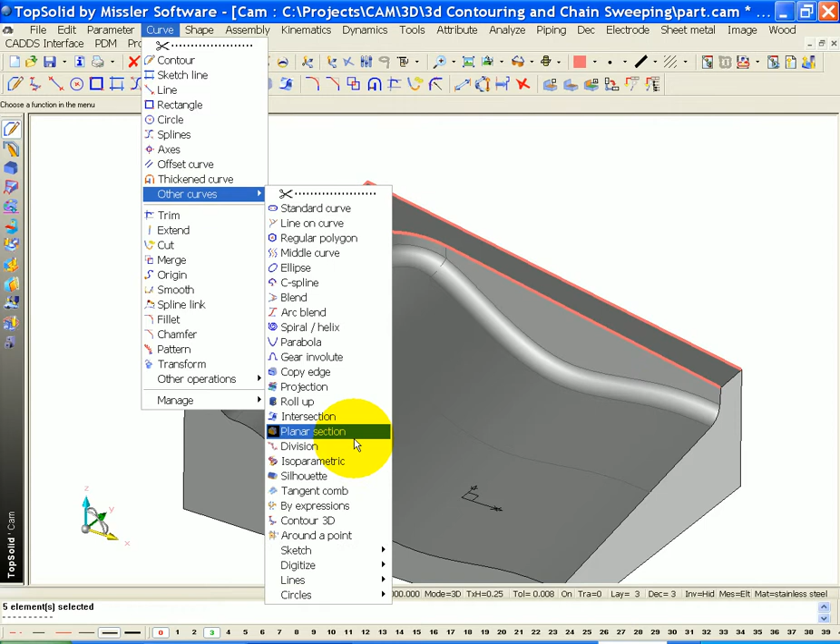So I'm going to go to Curve Projection. And I'm going to window select them. Z positive. To a plane, I'm going to set Show Curves to No, XY. And now I'll hide the driving curves.

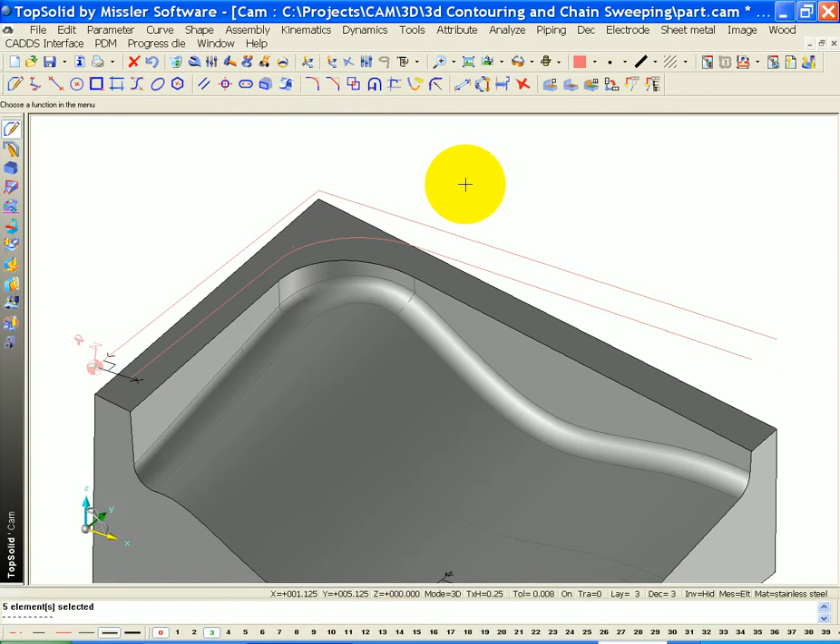From here, what I want to do is this. Right now, I'm going from a fillet to a sharp corner. And I need to have a little bit of a fillet on that sharp corner to have an even number of segments, or to be able to make a nice smooth transition between the curves for my guide surface.

So what I'm going to do actually is I'm going to offset this out. We're going to offset that out to a thinner line style. So I'm going to offset that out maybe 1/8 of an inch. Offset that out maybe 1/8 of an inch. And now what I'm going to do is cheat. I'm going to go to another layer. And I just want simple lines here.

I'm going to go from there to there, there to there, here to here, here to here. And you don't really need to do this. This is just showing you ways around stuff. I'm going to trim those together. Trim that to that curve. Trim this to this curve. Do reverse trimming as well. And I'll sew all those together.

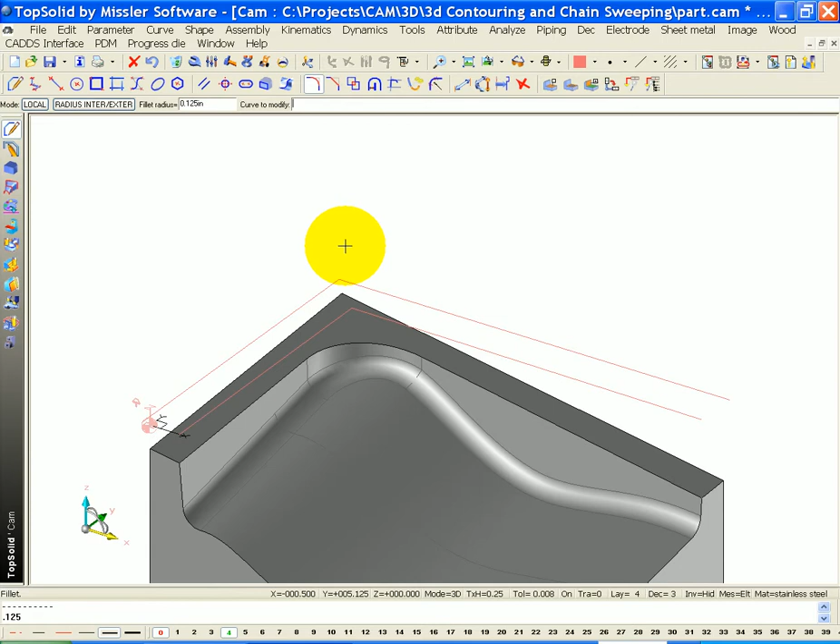And now what I'm going to do is add some fillets. I'm going to say I want a little 1/8 inch blend there. And how about a 1-inch blend here? If I look straight at this, you can see my 1 inch is following nicely along my edge.

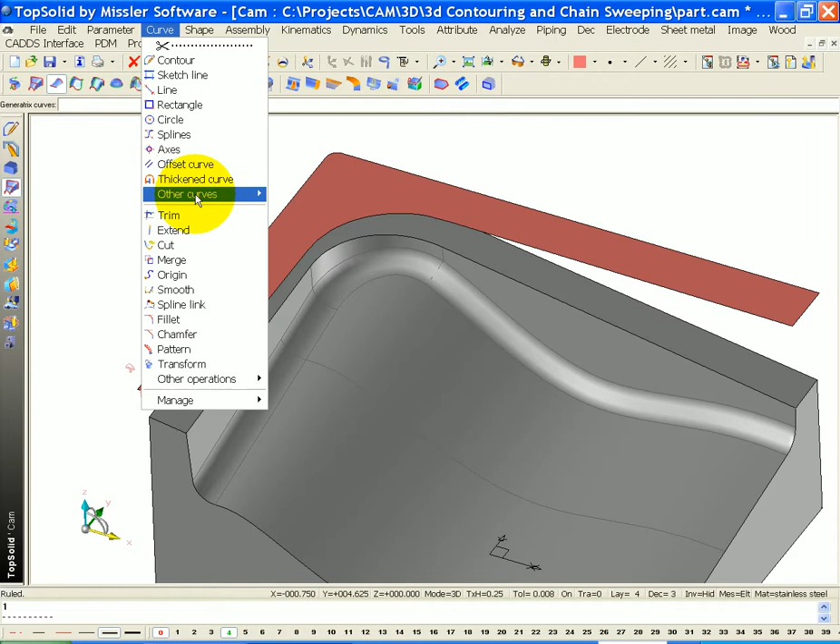And now from here, I'm going to go make a ruled surface. I'm going to rule between that and that. Okay? The act of doing that is actually going to make the U and V curves based on the two curves that we ruled between. To show you that, if I go to here and go to Isoparametric by Parameter and select it, you can see the U curve, and that's really what's going to guide the toolpath.

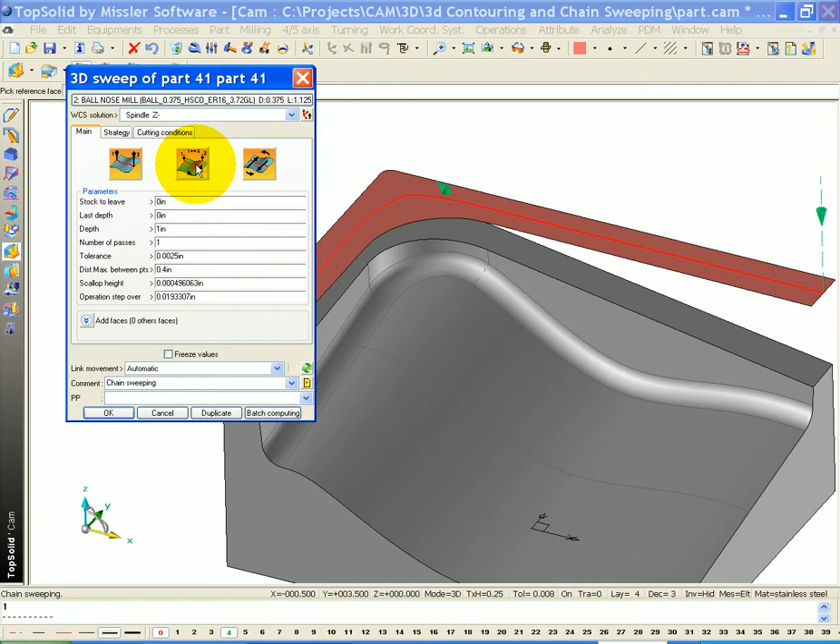Okay? From there, let's go to 3-axis, chain sweeping, and instead, let's select this face to machine. Here you can see your U curve. Let's switch it to that. We'll use the same tolerancing and whatever. The only difference here is we're going to go to Project on Part onto that face, or as many faces as you want. I'm going to say End, and say OK. And now here, you can see we're doing a more flow style of machining.

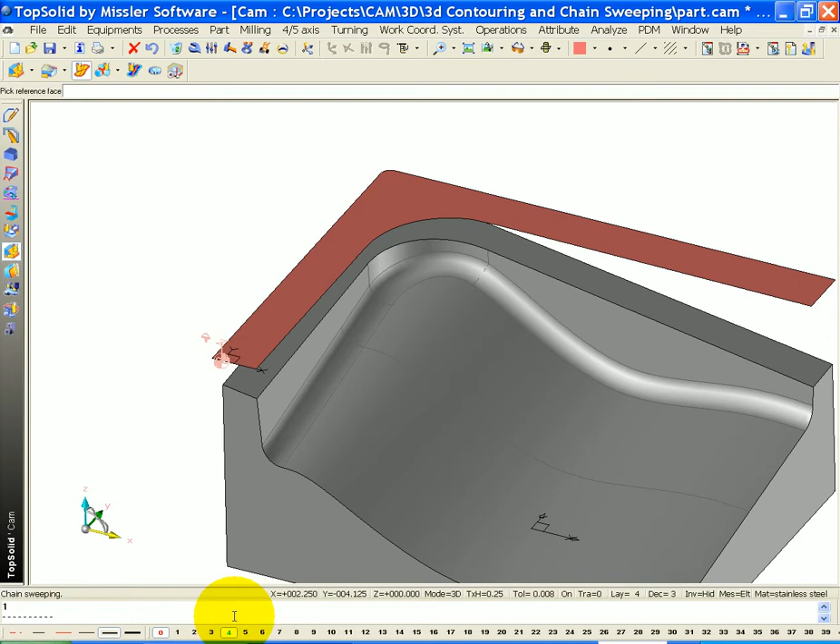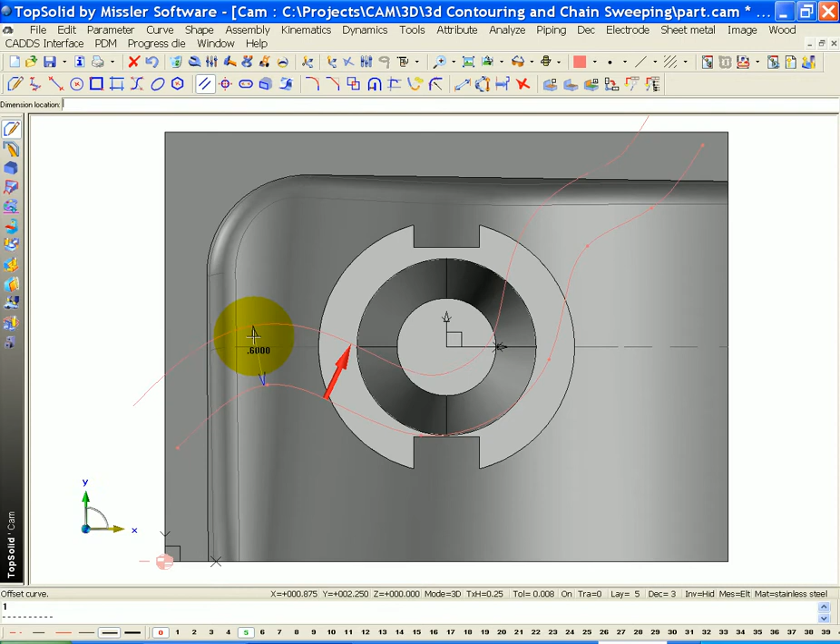Now, just to give you one more example of this, to use UV style cutting but along multiple faces, watch. I'm going to go here and go make some kind of spline. I'm going to offset said spline to maybe there. I'm going to go ahead and make my ruled face. And now we'll go ahead and use that to machine all the faces.

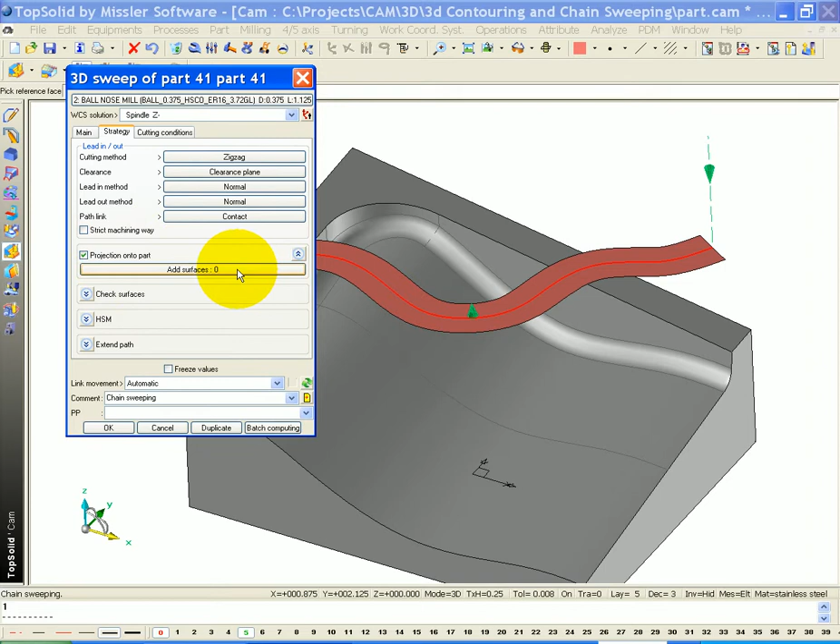So we'll go back to 3-axis, chain sweeping. I'm going to select that face. Let's go along that way. And I'll project onto the part, onto this face, that, maybe that, all of it, right? We'll say OK, and OK.

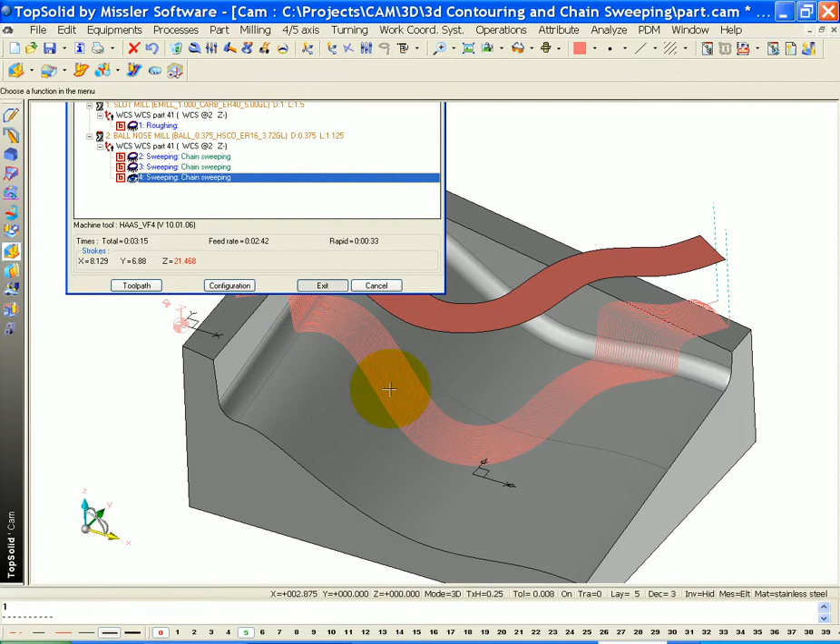And like that. Probably don't want to dip down the back side, but you get the point. It gives you some freedom to do chain sweeping, but along multiple faces as well. So you have some control of toolpath.